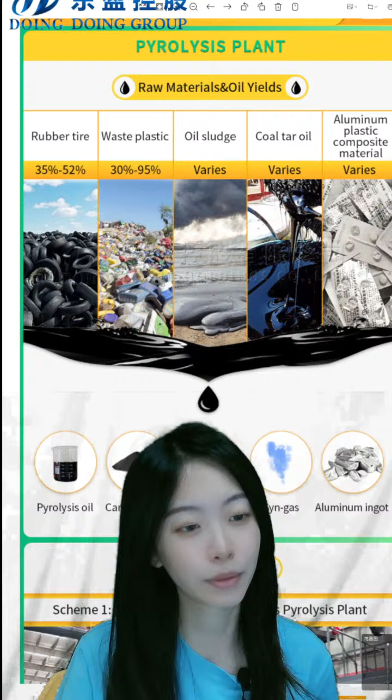Behind me is the introduction of our equipment. You can see that we are a pyrolysis plant manufacturer. Our equipment is a pyrolysis plant used to pyrolyze waste tire and waste plastic into fuel oil or diesel. This is what our equipment can do.

I will give you an introduction about this brochure, and any questions you have while I'm introducing it, you can just ask me.

This is our company. We are in China, as I said, the Henan Doing Environmental Protection Technology Company. We're based in China, but we have customers and clients on all continents, with equipment working in more than 120 countries.

If you want to see how good or how well our equipment works, you can come to our factory to have a visit, but you need to contact our manager first. Then our manager will contact the clients and arrange when and how you can visit.

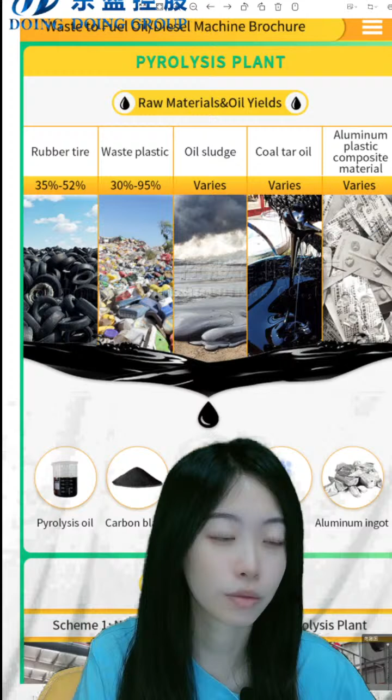This is the brochure of the pyrolysis equipment. First I will introduce you to the raw material and the oil yield. You may ask what materials our equipment can process, and how much oil I can get. I will give an introduction for you now.

The main raw material of the pyrolysis equipment is rubber tire and waste plastic. This is the most common material we meet in the market, like this rubber tire.

The oil yield ranges from 35 to 52 percent. This all depends on what kind of tires you have. If you have big tires from trucks or big cars, the oil yield can reach 42 to 45 percent, which is very high. But with small tires like from bicycles or motorbikes, the yield can reach about 35 to 40 percent.

Although the oil yield is lower than the big tire, it's cheaper, so you can still get the profit. More bosses these years have chosen this kind of small tire because in China, the big tires like those from trucks are becoming more and more expensive.

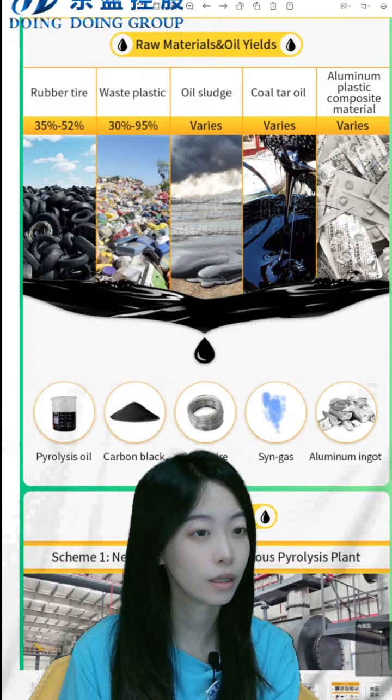Or if your country or region is very far from China, you can just send some photos or pictures to our sales managers, and we will do some tests or analysis.

This is the third raw material about pyrolysis equipment: oil sludge. It's quite a normal thing in some countries that have oil fields.

Some bosses will have this kind of raw material, and it can also be pyrolyzed by our equipment to get the fuel oil and other things like the flue gases. They can also get some profit from the government, because there is waste, and they can help the government deal with this waste.

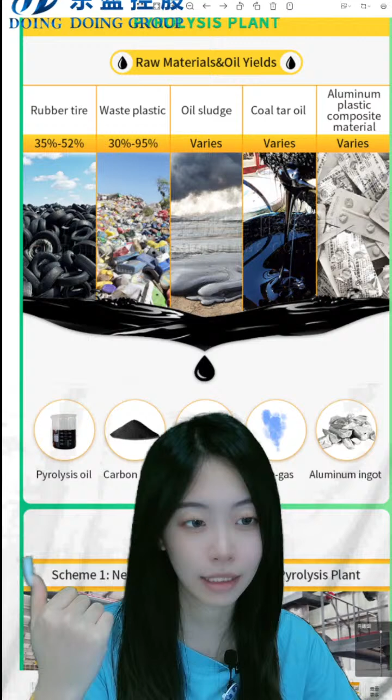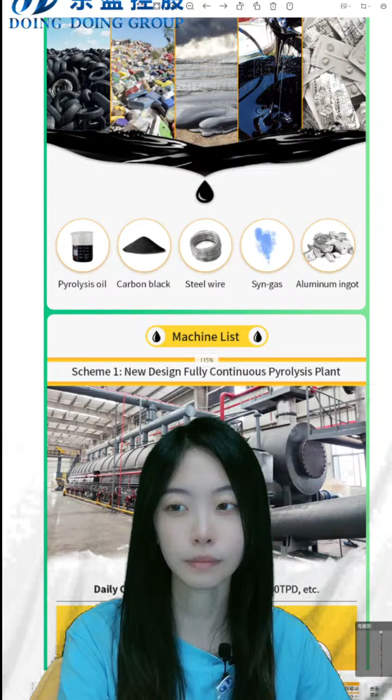For example, aluminium can sell for more than 10,000 per ton. From pyrolysis, you can get pyrolysis oil, carbon black, and steel wire from the waste tire, or plastic oil and carbon black from plastic, and other products. For any raw material you want to know about, you can just contact our sales manager.

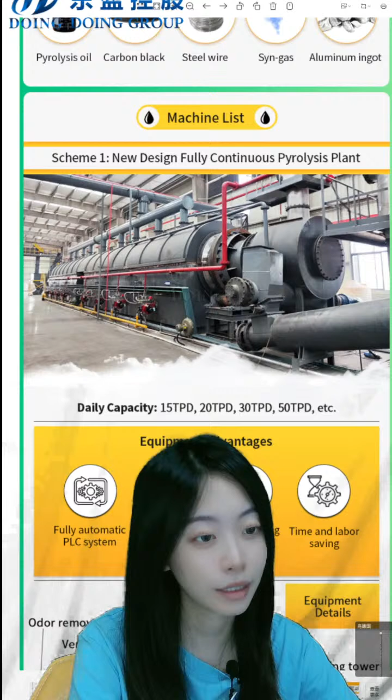Next, I'm going to introduce what kind of equipment our company has and their advantages, and what advantages each equipment has.

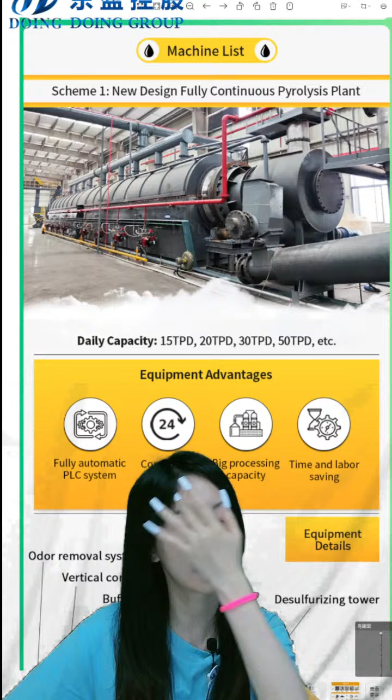This is the first equipment, called the fully continuous pyrolysis plant. It's our new design. In China, the government encourages this kind of market and project to have the fully continuous pyrolysis plant, because it has the biggest capacity, is more environmentally friendly, and is safer.

It has many more safety devices. The government encourages us to have this fully continuous pyrolysis plant, and it's only been around for these recent years, maybe since 2020, just 4 to 5 years. But our company has had this kind of equipment for many years, so we have a mature design and mature equipment.

Few companies in China have this kind of design, so you can trust this design and our company. For any doubt or more details you want to know, you can come to the client's factory in China, or we have fully continuous plants in many countries, like Russia, Brazil, maybe America, and India.

So in many countries abroad we have the fully continuous plant. You're welcome to visit the client's factory or our own factory. All the equipment, all the details, and some small designs, are all produced in our own factory.

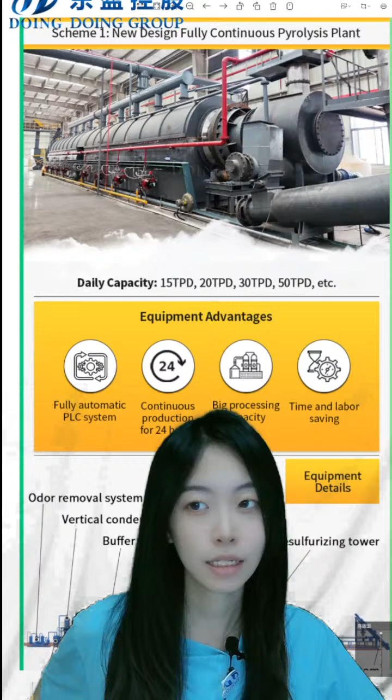So we just talked about the fully continuous plant having a larger capacity. What's the daily capacity? It shows we have 15 tons per day, 20 tons per day, 30 tons per day, and 50 tons per day. Most of our clients will choose the 30 tons and 50 tons.

This is a customer from Chongqing in China, with a capacity of 30 tons. They can produce 30 tons of rubber powder from waste tire per day. So you can say it can process 50 tons of waste tire per day.

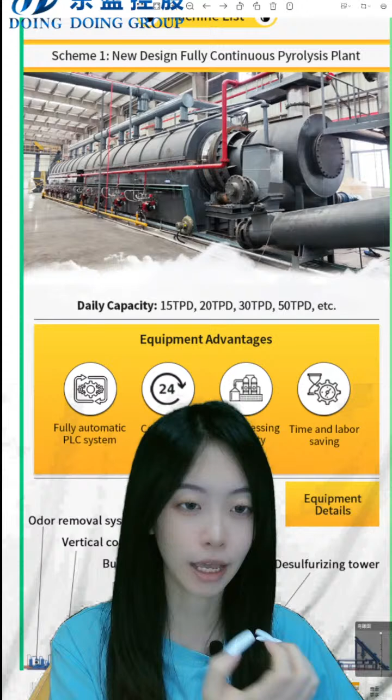The capacity is much bigger, and another advantage is it can work for 24 hours, and it can work 45 to 60 days without stopping. So we don't need to cool down the reactor to discharge carbon black, we just need to keep working. It can feed raw material and discharge carbon black at the same time, so it's more time-saving and more efficient.

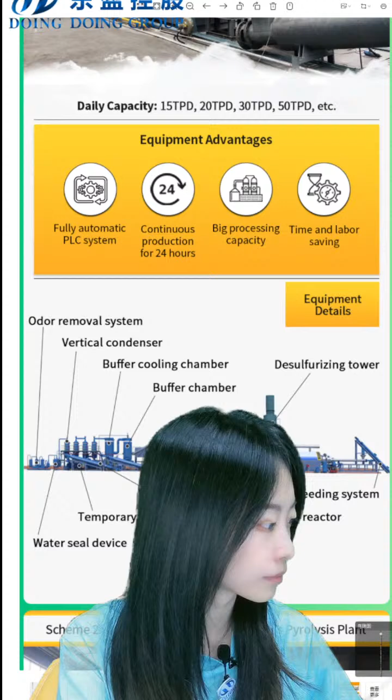Another equipment advantage we have is the fully automatic PLC system. It's automatic and saves more labor, saves more workers. For one 50-ton production line, you just need maybe 3 workers. We don't need many workers, just 1 or 2 workers in the feeding system and 1 worker in the discharging system. This saves on your worker costs.

The second advantage is continuous production for 24 hours, and it can work without stopping for 45 to 60 days. Compared with the batch type pyrolysis plant and the semi-continuous pyrolysis plant, it's more efficient and can work for much longer days.

With the batch type pyrolysis plant, we need to cool down the reactor before we're allowed to discharge the carbon black, so we can only have 1 batch per day, and 1 batch's capacity is like 15 tons or 12 tons. So you can compare 15 tons with 50 tons, it's much different.

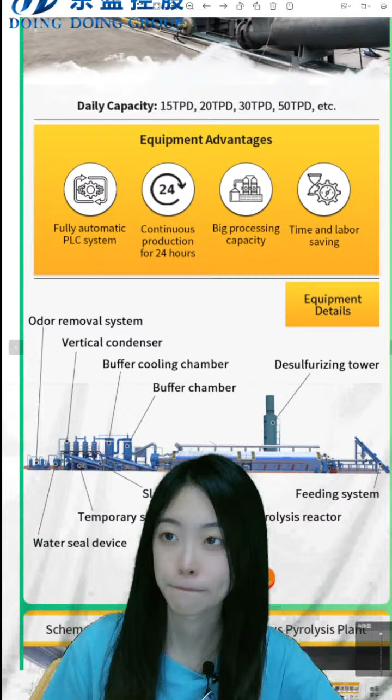This is the big processing capacity we just talked about, and the time and labor saving we just introduced. It saves more time since we don't need to cool down the reactor, and the labor saving comes from the PLC system saving more workers, we just need 2 or 3 workers for the whole line.

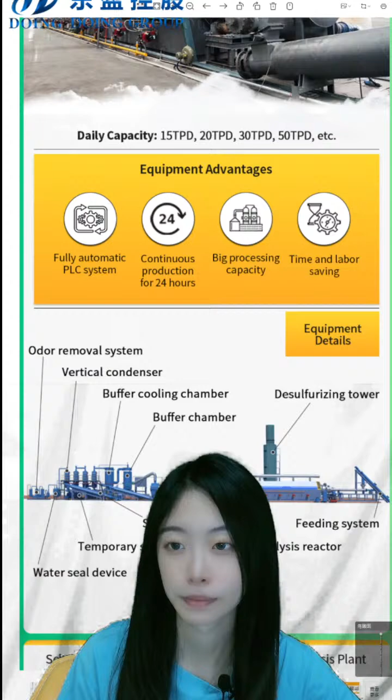And this is the design, the equipment details. You can have a look.

We also have the 3D video, this is the 3D picture. We also have real photos and real video for our customers, photos taken in our factory.

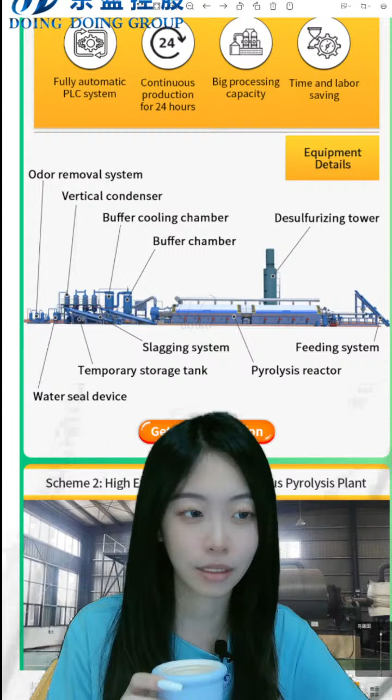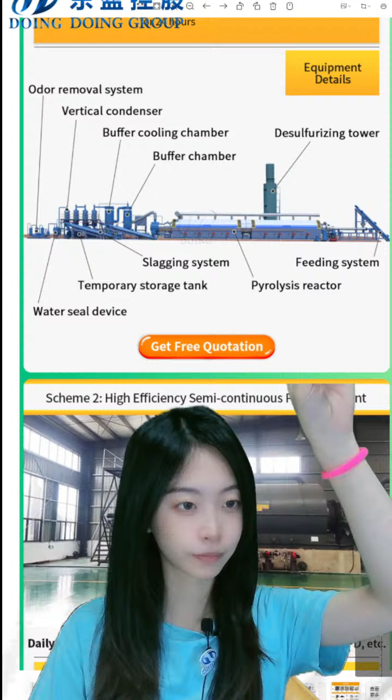And you can see this, we have this kind of system, the feeding system. Okay, never mind. The first is the feeding system.

It feeds the raw material like the rubber powder from waste tires, or plastic, and oil sludge. We can also feed it into the reactor by the winch. This is the feeding system.

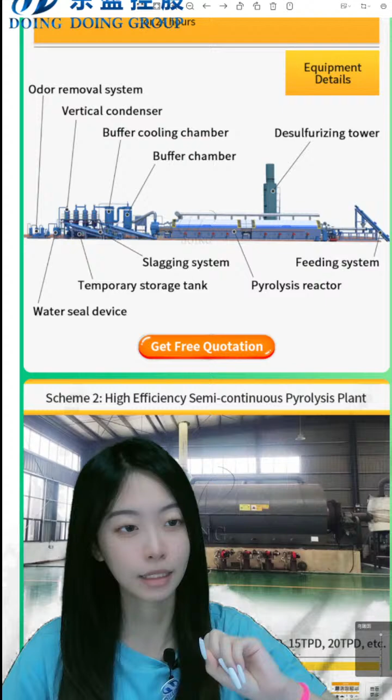And the second system is the pyrolysis reactor, the pyrolysis system. You can see that this fully continuous pyrolysis plant is much longer than the semi-continuous one. This can reach 26 meters, so we can have much more capacity, much more rubber powder as raw material.

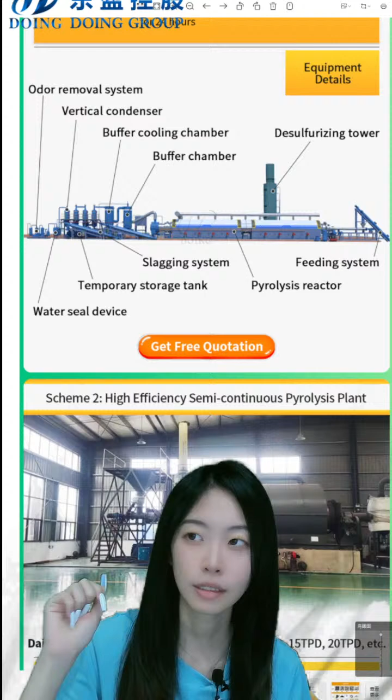Later, after the pyrolysis, we get the oil gas outside the pyrolysis reactor. It comes out from the outlet and first reaches the buffer, called the buffer cooling chamber. This is the cooling system, or condensing system, which cools down and condenses the oil gas into oil.

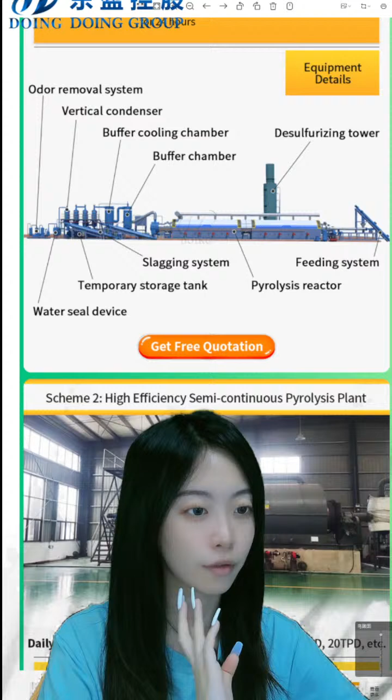And then this is one of the most important products we get, the fuel oil. I forgot to introduce you to what our fuel oil can be used for. Can it be used as car fuel? Well, the answer is no.

We can use it because it has very high heating energy, for places like brick factories, glass factories, generators, and cement factories - places that need plenty of heating energy.

Or if you want to refine your oil, you can have a refining system and get diesel after the pyrolysis. Diesel can be used for large agricultural machines, ferries, boats, and similar applications.

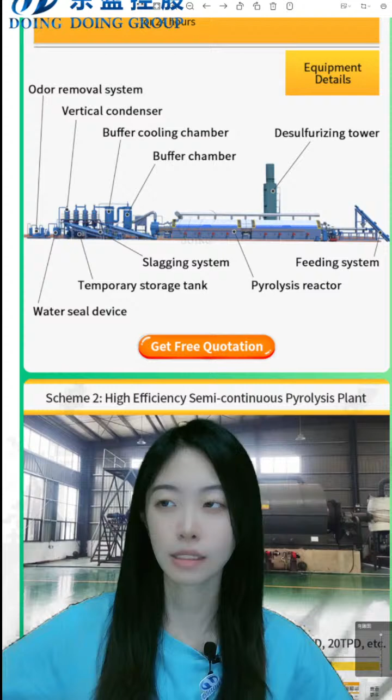The carbon black also has very high heating energy and can replace coal for heating, or it can be used as a raw material for rubber or paint. This is how carbon black can be used.

We can also get steel wire from the waste tire, and you can sell it or just melt it.

Another important system is the odor removal system and the desulfurizing tower. We also have flue gas outside the reactor, and if we don't treat it, it's not allowed by the government. For example, in China, the government would not allow this project without treatment. So we need the flue gas purification system to reach the standards our country requires.

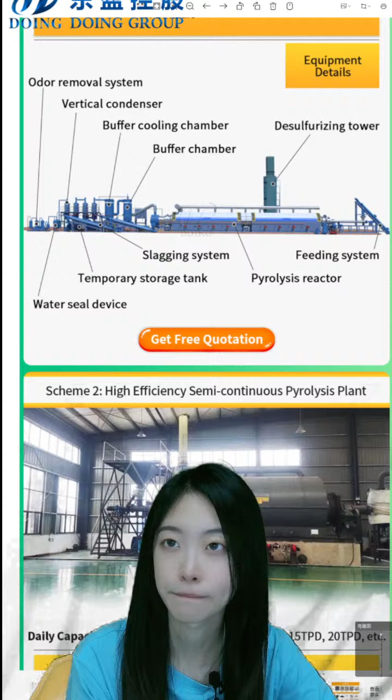Different regions have different policies about flue gas purification standards, but our equipment can reach your standard for your region. For example, in China, different provinces have different policies, and we have different kinds of equipment to reach different standards.

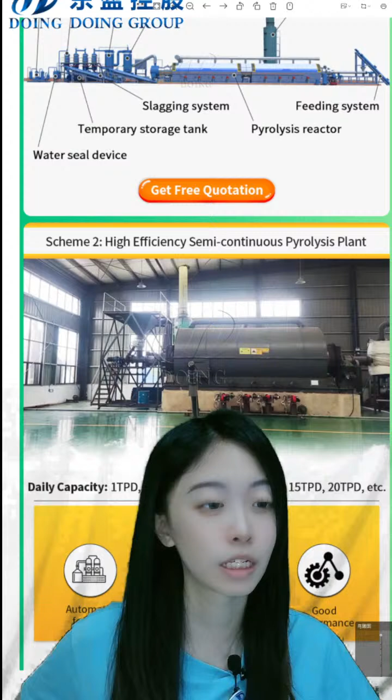And this is the second equipment our company has, the semi-continuous pyrolysis plant. You can have a look at this picture.

Well, the capacity is smaller than the fully continuous, but is much larger than the third one, the batch type. You can see the difference between the semi-continuous and the fully continuous in the reactor. The biggest difference is in the reactor - it's smaller and shorter than the fully continuous.

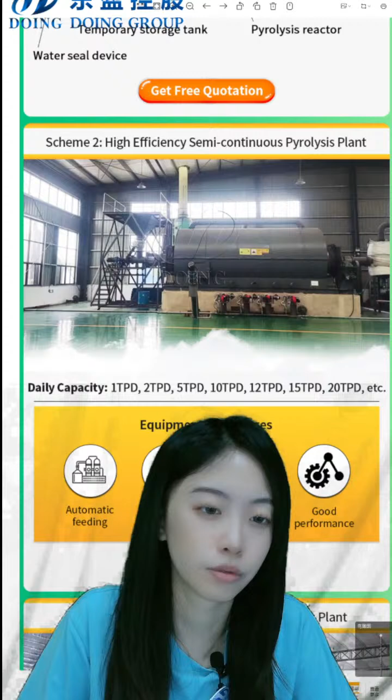And this - the reactor is smaller and the capacity is smaller. But the advantage of the semi-continuous is we don't need to cool down the reactor to discharge the carbon black. We can discharge the carbon black at very high temperature. The reactor reaches a temperature of 200 or 300 degrees, so we don't need to cool it down to a common temperature like 50 degrees to discharge the carbon black. It's a kind of time saving.

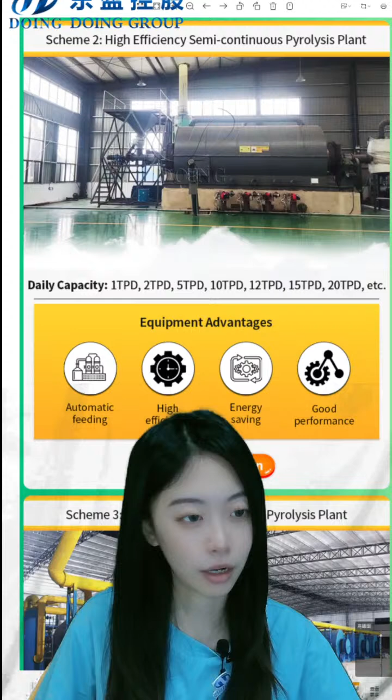If we cool down the reactor, we need many hours, maybe 4, 5, 6 hours - it's a waste of time. So we have a small reactor between the pyrolysis reactor to discharge the carbon black, and it will slow down the temperature by itself, or you can have water cover the reactor to cool it down. But this will not influence the biggest reactor, the pyrolysis reactor, so it can also continue pyrolysis. That's why it saves time.

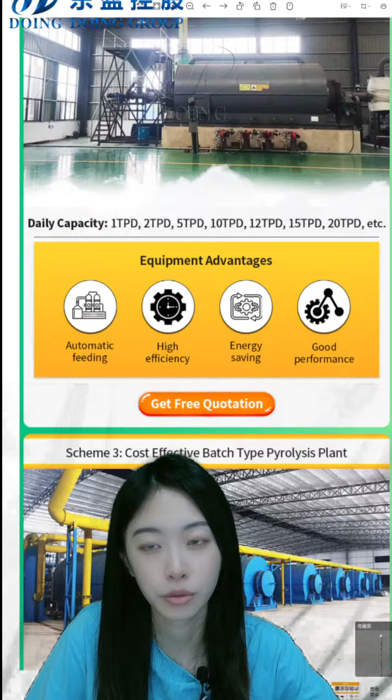Well, the advantage of the fully continuous and semi-continuous is the capacity is from 1 ton per day to 20 tons per day, and it's automatically feeding. We just need to feed the rubber powder, and it can feed and discharge at the same time - high efficiency.

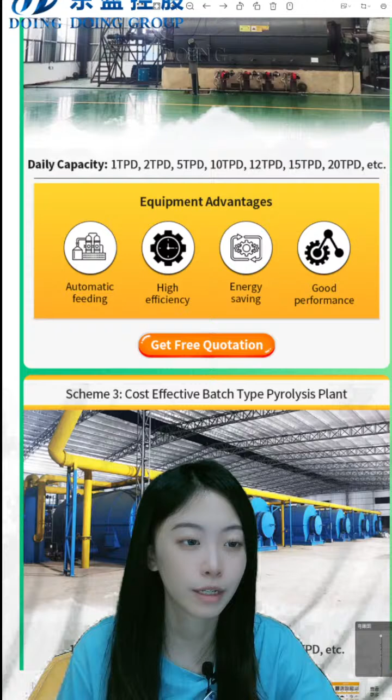Well, why do we say that it's energy saving? It's because after the pyrolysis, we not only get the fuel oil, we also get the tail gas, and the tail gas can return to the reactor as heating energy. So we don't need to use natural gas or fuel oil to heat the reactor later. We just only need to use the tail gas to return to the reactor, so it's more energy saving - it also saves energy in the fully continuous system.

For example, if we work for 45 days, we only need 8 hours to use natural gas or fuel oil to heat the energy, and then the next days we only need to use the tail gas. We have abundant tail gas after the pyrolysis - we just only need this kind of heating energy.

Good performance. Also, we have many clients using the semi-continuous to run this program, for example in Nigeria or in China, many provinces also have the semi-continuous. You're also welcome to visit.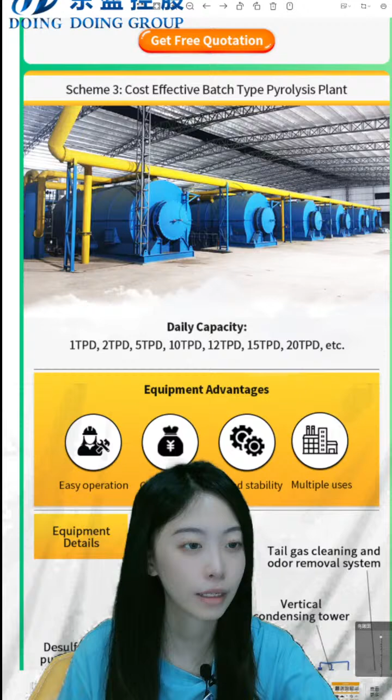And this is the batch type pyrolysis plant - the third equipment our company has, and it has a much longer history. So many bosses will choose this raw material, this equipment.

You can see that one advantage the batch type has is multiple uses. Why do we say that? That's because nearly all kinds of raw material that can be pyrolyzed, we can use the batch type to produce. It's a very empty reactor in this room, and we just put the raw material like whole tires or mixed plastic, oil sludge, or coal tar oil in the reactor to do this pyrolysis project.

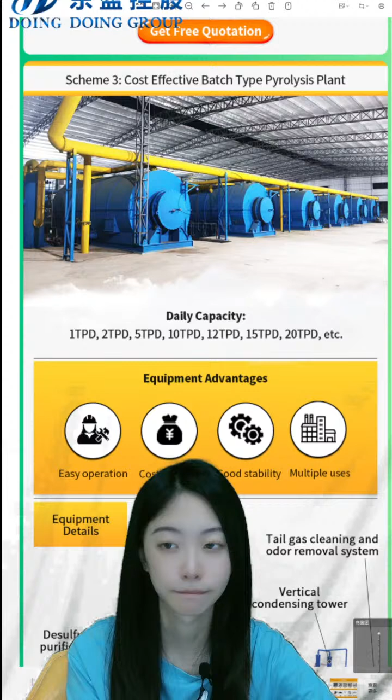Well, you can see the picture - this is the reactor, very similar to the semi-continuous. And this is the flue gas pipe, the feeding doors, and outside behind this is the outlet and the condensing system. We have two kinds of condensing system: the tube condensing and the water tank condensing.

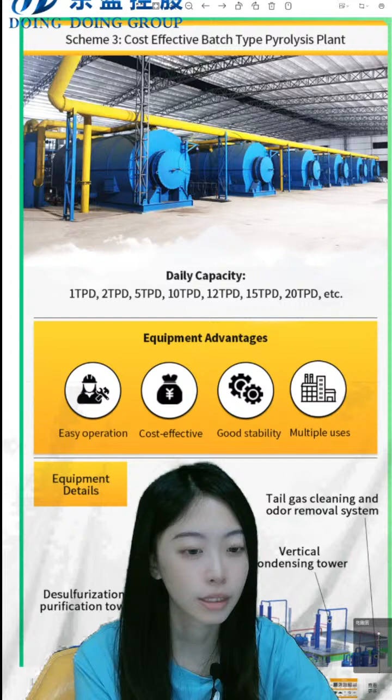Some advantages of the batch type pyrolysis plant: easy operation, cost effectiveness, good stability, and multiple uses. These are the advantages, so many bosses choose this equipment. There's a reason for that.

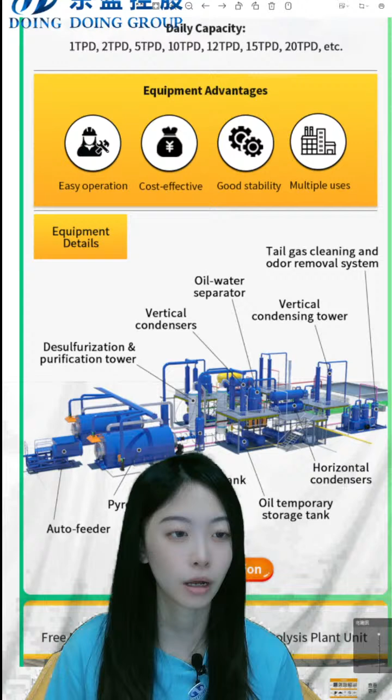It's much cheaper than the fully continuous type. You can buy one or two lines at first for your product, and if you know more about the market and the data, and get more profit from the pyrolysis, you can set more lines. Our suggestion is you can set 4 or 6 lines.

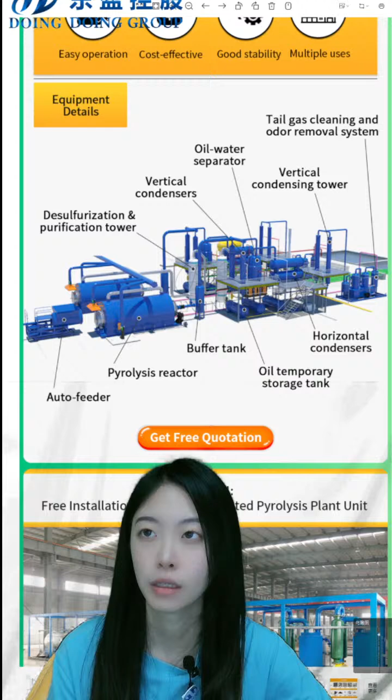This is the 3D picture of it. We have some 3D videos if you want to know more about this. You can just send your message.

Send us your requirement. For example, 'Hello, I want to get the brochure' or 'I want to know more, can you send more real pictures of your equipment to me?' Of course, you can just send a message to us. Anything you want to know about the market, the details, the profit, just let me know.

And 3D videos, 3D pictures, you can have a look. We have the auto feeder, pyrolysis reactor, and the gas will come out from the outlet and reach the buffer tank. The buffer tank can slow down the speed of the oil gas, and then it will reach the condensing system, where the oil gas turns to oil.

The oil gas turns to oil and is temporarily stored in this oil storage tank. This is a patent of our company. What's its name? The tail gas cleaning and odor removal system, or you can just call it the odor removal system.

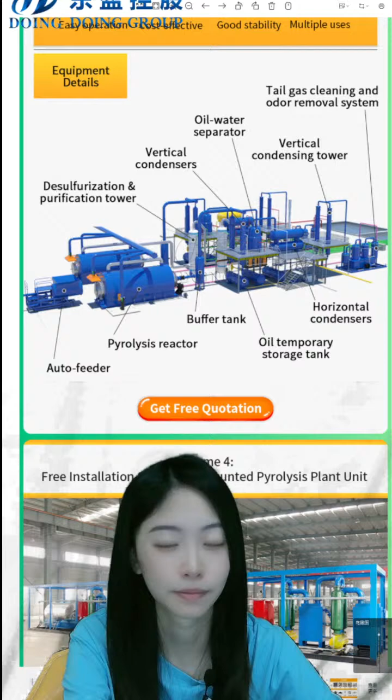And next is the discharging system. We have 3 ways to discharge the carbon black for the batch type pyrolysis plant, all due to your requirement and what kind of raw material you have. Like if you have waste tire, there are 3 kinds of ways to discharge, all suitable for your raw material. You can discharge it indoors, or side discharge, or discharge at the outlet. It can also be designed.

It has some disadvantages and advantages. If you want to know more details, you can just contact us, and our sales manager will give you an introduction with more details.

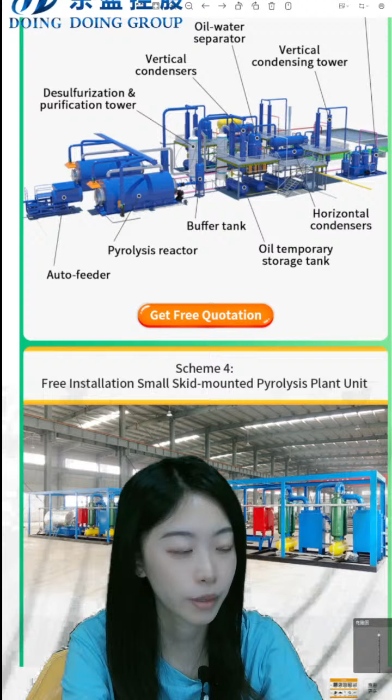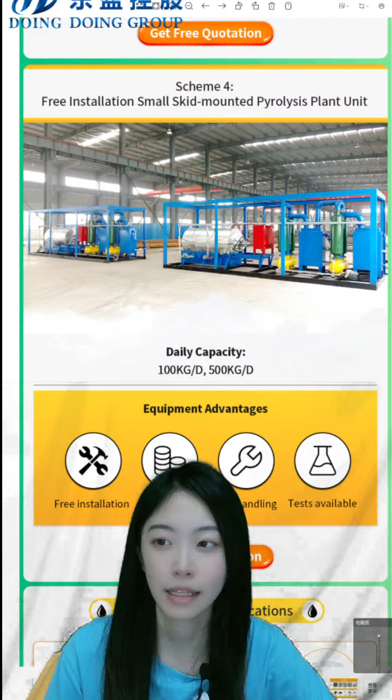The third one is the batch type, and the fourth one is the pyrolysis plant unit, a small pyrolysis plant unit. You can see it is quite smaller. This is the whole line of the pyrolysis project, and the daily capacity is much smaller - 100 kilogram per day, or 500 kilogram per day.

But although it's small, all the projects have this same design. Like this is the reactor, and this is a condensing system, the odor removal system, discharging system - it also has all of these.

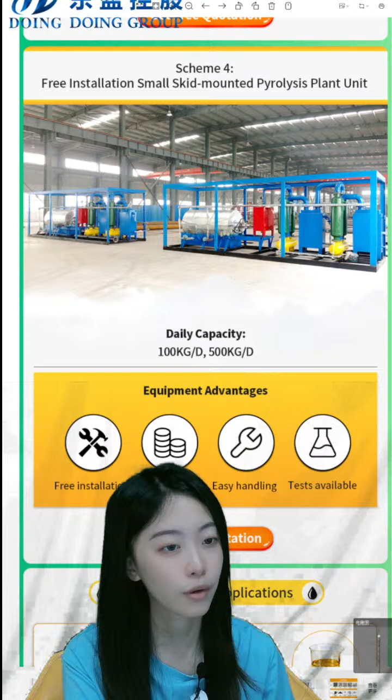Some colleges or environmental places will have some environmental testing needs, and they want to get more data or other things about the pyrolysis project, so they will buy this kind of pyrolysis unit. Or some farmers, like many farmers in America or Australia, will buy this unit, and they can get fuel oil and diesel after the pyrolysis, and use this oil or diesel in their agricultural machines. This is the market this kind of pyrolysis unit has.

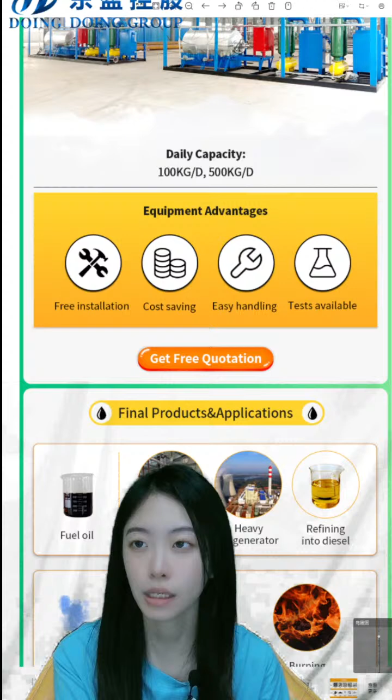The advantages of this kind of unit are maybe free installation, cost saving, easy handling, and test availability. These are the advantages.

For example, the installation - some bosses will ask, 'If our factory is not in China but abroad, how can we do the installation?' Well, you don't need to worry about it. Our engineer and our sales manager will fly to your country to teach you how to install it, and we have installation workers to help you install it.

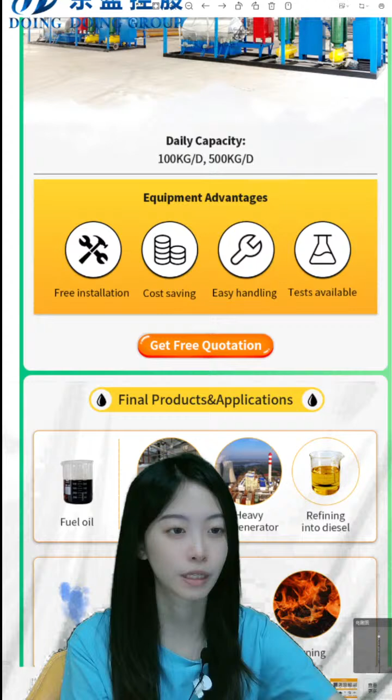You don't need to worry, because we have more than 13 years of history as a company. We were founded in 2011, and we have a lot of experience. You don't need to worry about after-sales service and selling. For example, we have managers to help you with installation and work, and if you have any problems during your pyrolysis, our sales manager will also give you service. It's a long-time service, so you don't need to worry.

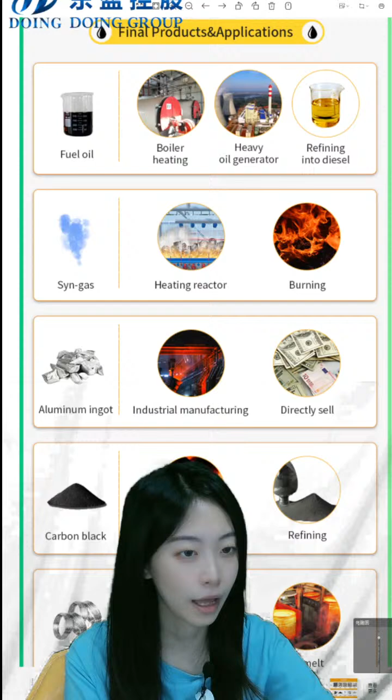And now this is the final product, or the application of the products. If your raw material is waste tire, we can get the fuel oil, the tail gas, and the carbon black, the steel wire after pyrolysis. The most important product of our waste tire pyrolysis is the fuel oil.

You can use it at the boiler heating, heavy oil generator, or if you have a glass factory, a cement factory, bricks factory, they need plenty of heating energy. You don't need to worry about selling it well. Many businesses, many factories need this kind of oil.

Or you can refine this kind of oil to diesel. And the diesel, just as I said before, can be used in agricultural machines.

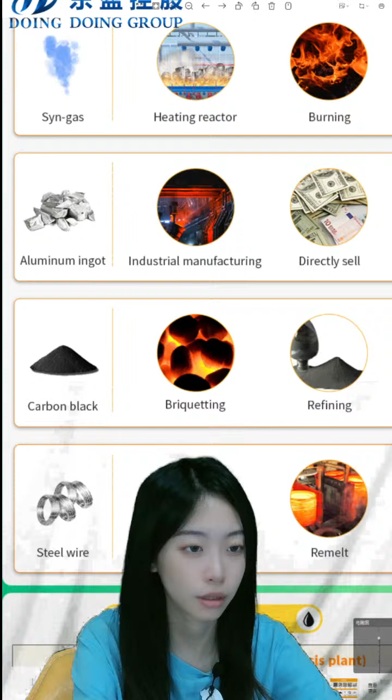And this is the gas, the tail gas. Tail gas can return to the heating reactor to heat the raw material. Or if you have other factories, you can link it with a pipe and use it for burning. Or maybe you can just store it, but that will cost some safety concerns. So our suggestion is you can just use it in the reactor or burn it directly.

Aluminium ingot, one of the most important raw materials from the aluminium plastic. Like this, the aluminium plastic industry, you can use it in industrial manufacturing or just directly sell it. It can sell at a very high price, more than 10,000 each ton. It's much higher than the fuel oil.

The actual prices, you need to consider different regions or different times. The market is changing.

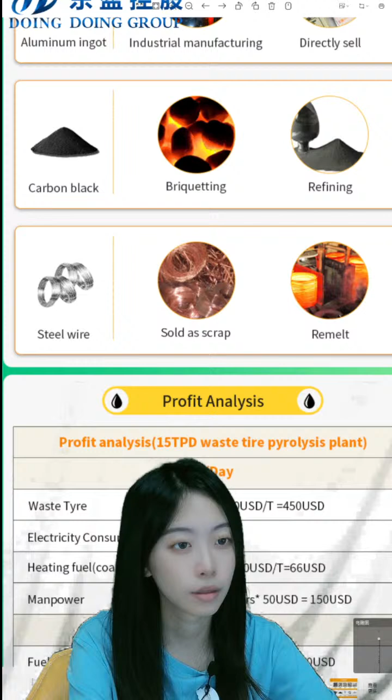This carbon black and steel wire is the main product of the waste tire. You can burn it directly and refine it into rubber or into paint, it also can.

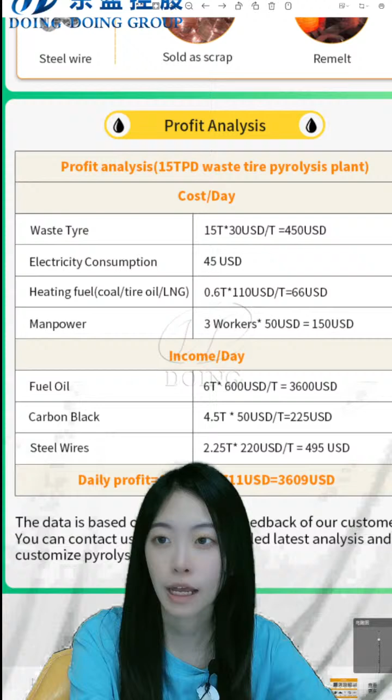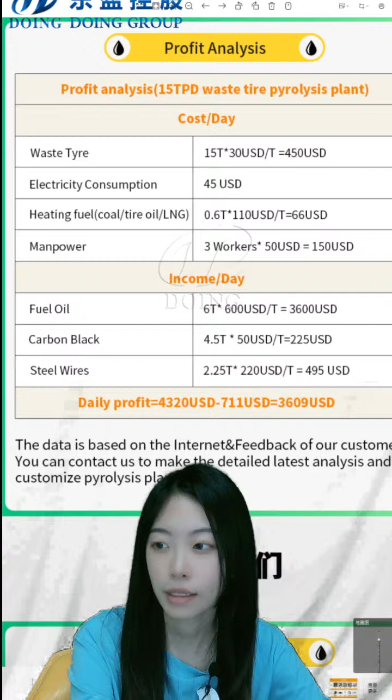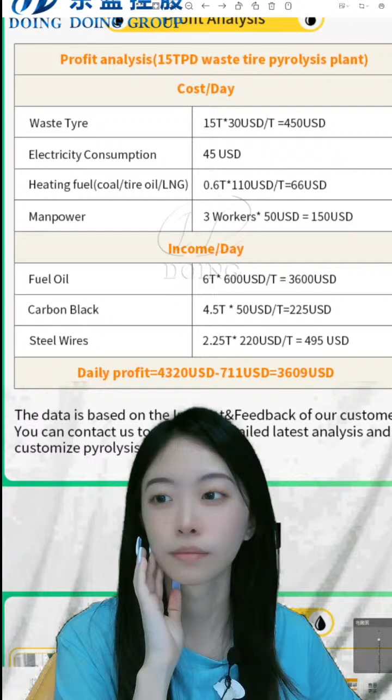Profit analysis. Cost - you can see this is all based on the internet or the feedback of our customers. So you can contact with us to make a detailed analysis, and many other details about the market or profit you can see. This is all due to the different kinds of raw material or different regions you're in.

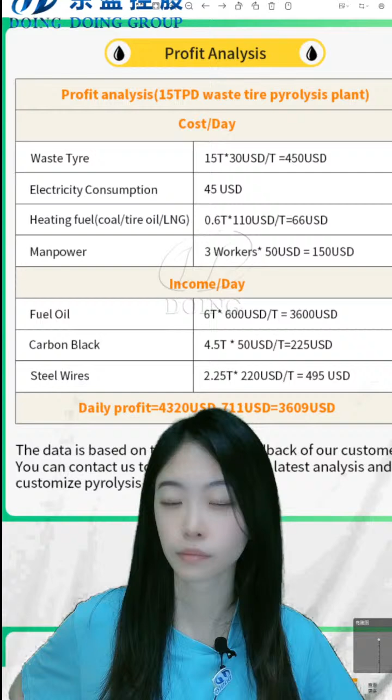You can see if your raw material is waste tire, and if you have 15 tons, in China now the waste tire is much more expensive than before - it may reach 1,800 RMB. And maybe in the United States, it's 30 USD per ton.

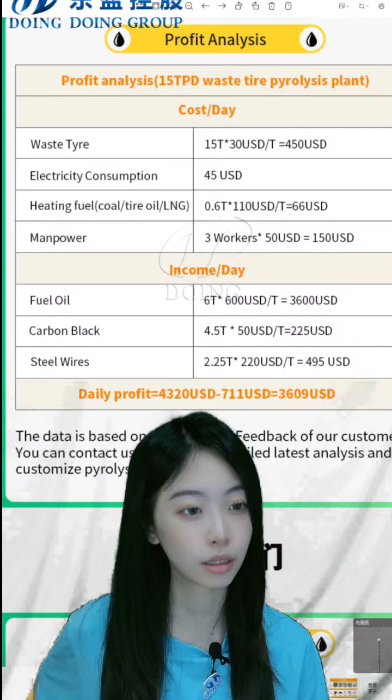The cost per day includes the raw material, the electricity consumption, the heating fuel, for example coal, tire oil, or natural gas. But as I said, if you use the tail gas, you can return it to the reactor, so you can save cost on heating fuel. The manpower - if you use the PLC system, it saves much more on manpower and increases income each day.

The fuel oil, the carbon black, and the steel wire - you can have a look.

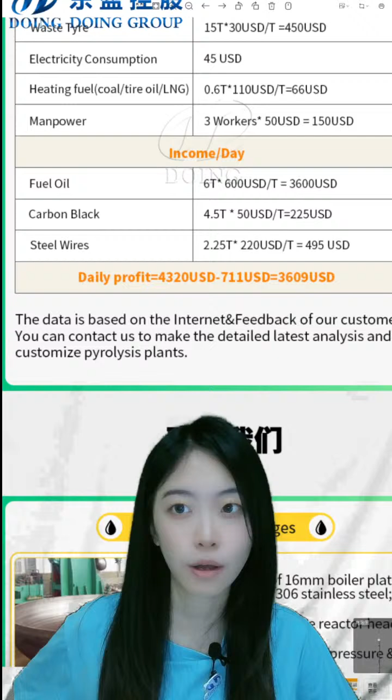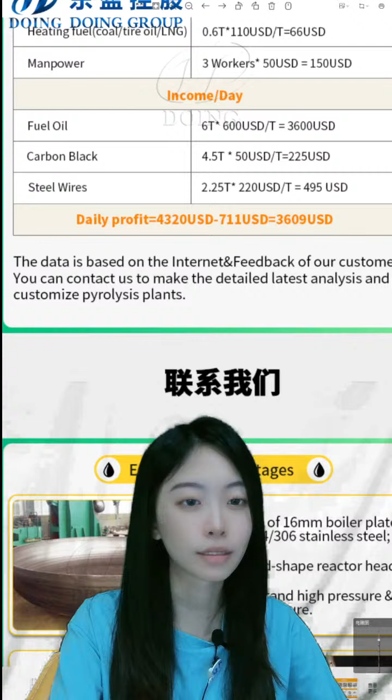As I said before, it's all based on the internet and the feedback of our customers, and many more details about the profit, the data. It's not very convenient to show on the live screen, so you need to contact with us, and the sales manager will give you an introduction. You may ask how you can contact with me, how the ways.

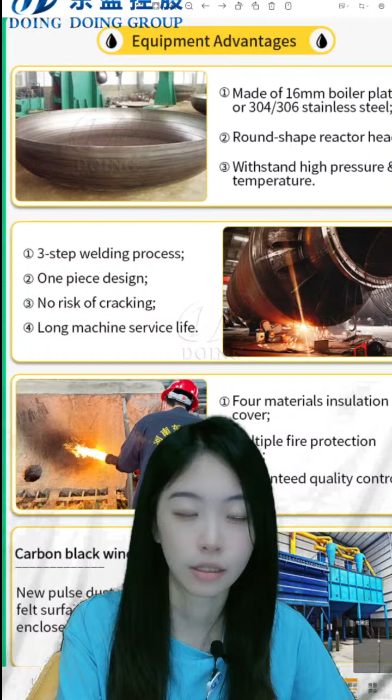Yes, and this is some equipment advantage of us. The welding process, you can see, or the design of the reactor head, it also has a very high level.

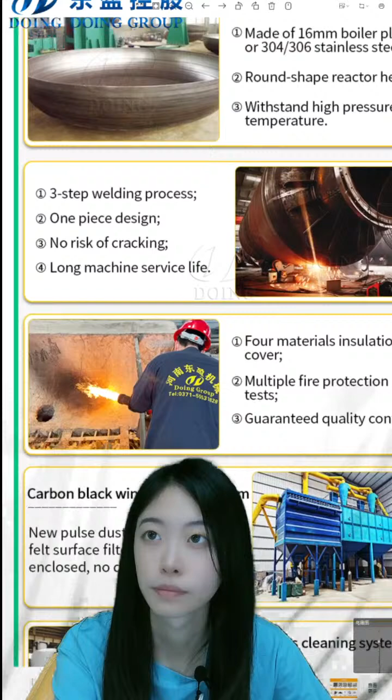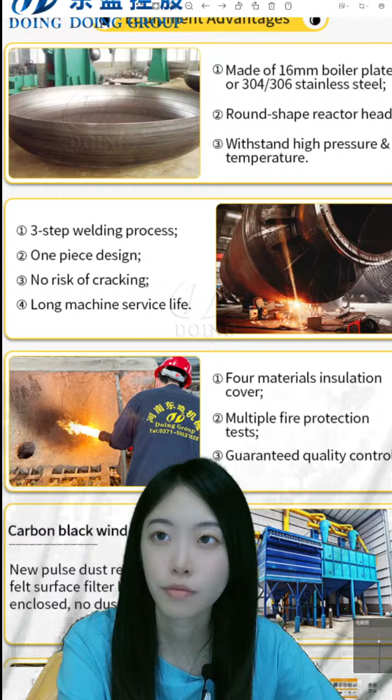The carbon black winding transfer system. You can see, the reactor head is made of 16mm boiler plates, a round-shaped reactor head, withstanding high pressure and temperature. Then, well, like you may visit other factories in China, they may have - it's not round shape, it's just like a plate.

The three-step weld process, also welded by the machine. One-piece design, no risk of cracking.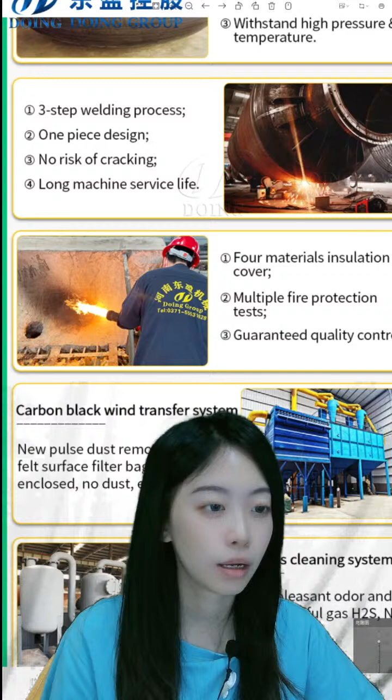We also have after-sales service, and we can promise about 1 year of after-sales service, plus long machine service life. For example, the fully continuous reactor you can use for 4 years.

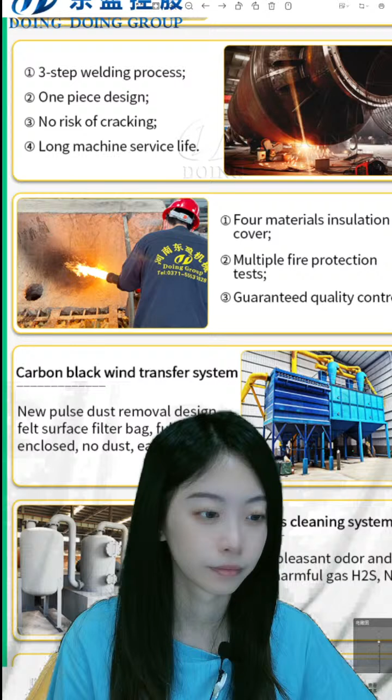And the four materials insulation cover, multiple fire protection tests, guaranteed quality control. We also can have this kind of service.

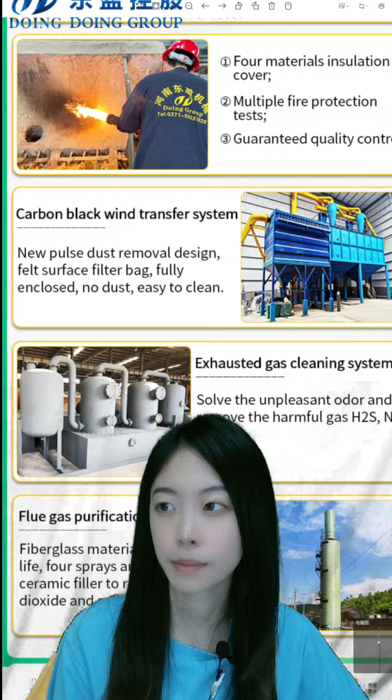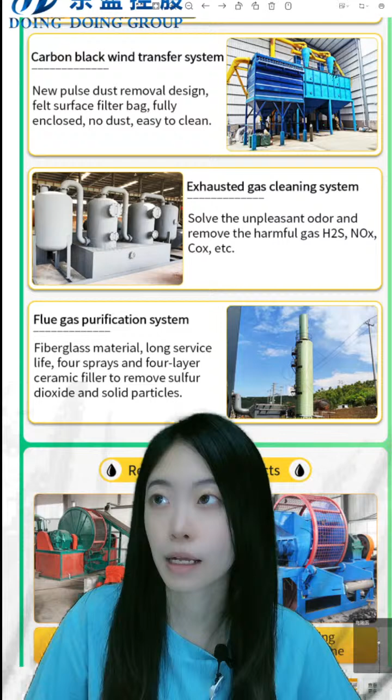The carbon black wind transfer system is underground, so there's no dust. In some places, the government is more strict and has the most strict standards, so they will randomly test your factory. You need to ensure your factory and workshop is clean without dust. But if your material is carbon black, your product is carbon black, it will have some dust. So in our design, the carbon black wind transfer system is underground and sealed, so you don't need to worry about this.

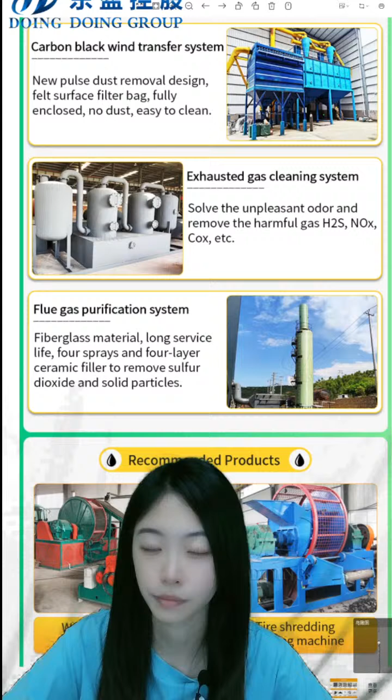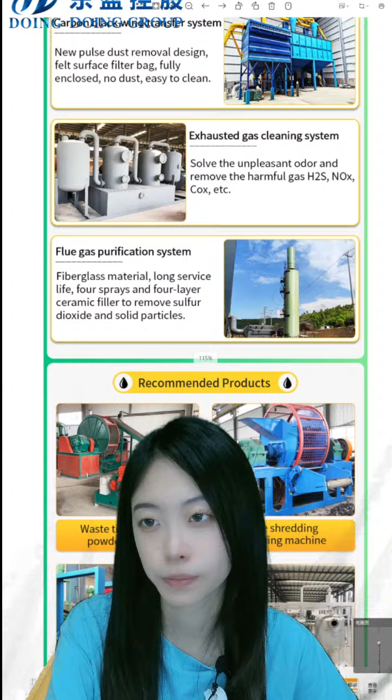Exhaust gas cleaning system. The flue gas purification system cleans the fiberglass material. It has a long service life.

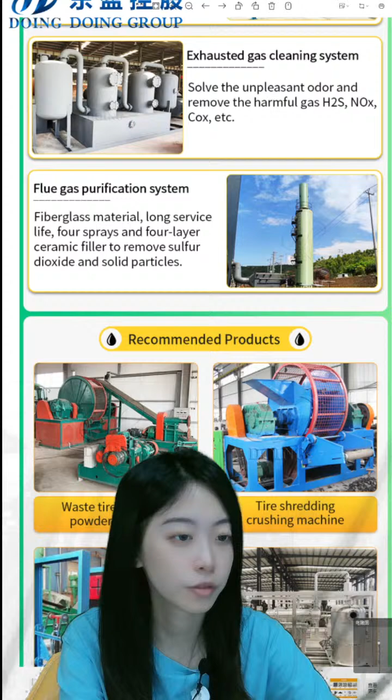You can see the tail gas - if you burn it directly, it will have a bad smell and is not environmentally friendly, so we can process it out. You can only have this kind of patented equipment in our country, in our company.

This is a recommended product: the waste tire to rubber powder machine. If your equipment is fully continuous or semi-continuous, you need to change the waste tire to rubber powder, so you can ensure it can feed and discharge slag at the same time.

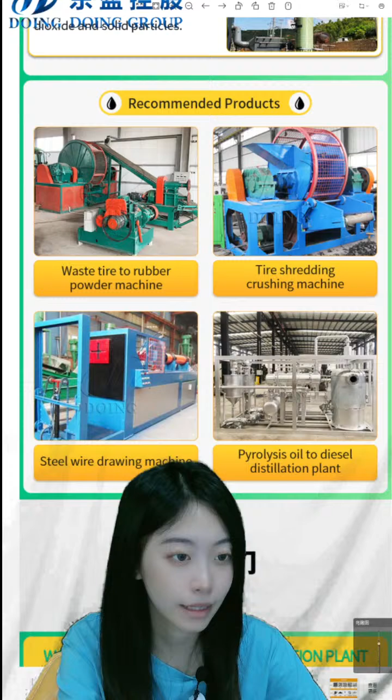Well, this is what our today's live show tells us, or introduces.